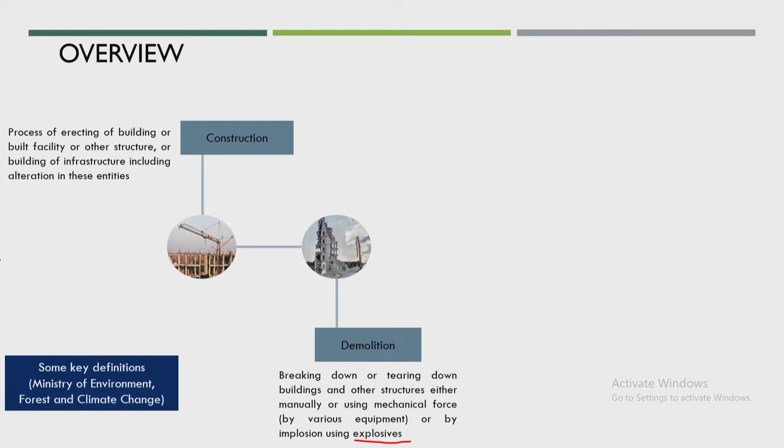When we talk about construction and demolition waste, as per the Ministry of Environment, Forest and Climate Change, construction is defined as the process of building any building or other civil structure or infrastructure. That gives the construction waste. Demolition waste comes from breaking down the building, and mostly these buildings are demolished by putting some explosives, and the entire building gets demolished.

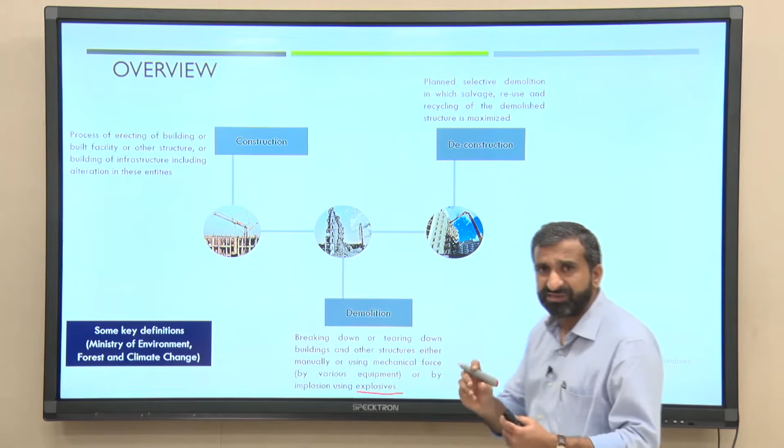The other one is deconstruction, which is different from demolition. Deconstruction means a planned demolition, which could also be for extension of the building. It is properly planned, and the waste amount will be as low as possible in the deconstruction process.

Finally, C&D waste comes from the building materials and debris used in construction, in repairing, or finally the entire demolition of any civil structure. The key difference between demolition and deconstruction is that deconstruction leads to less wastage and higher environmental sustainability. It is a properly designed demolition.

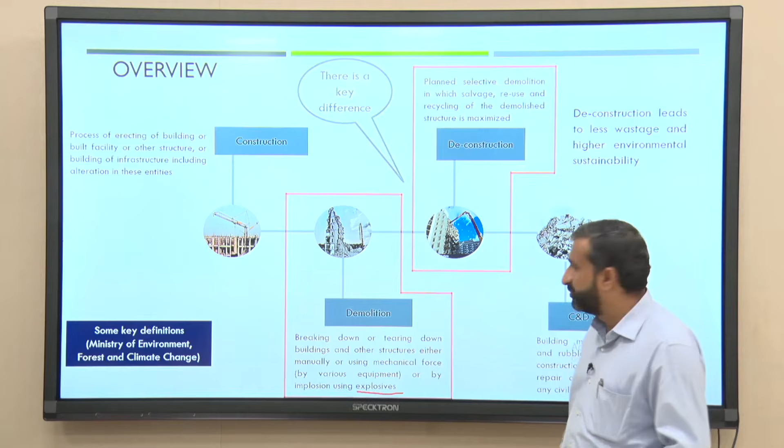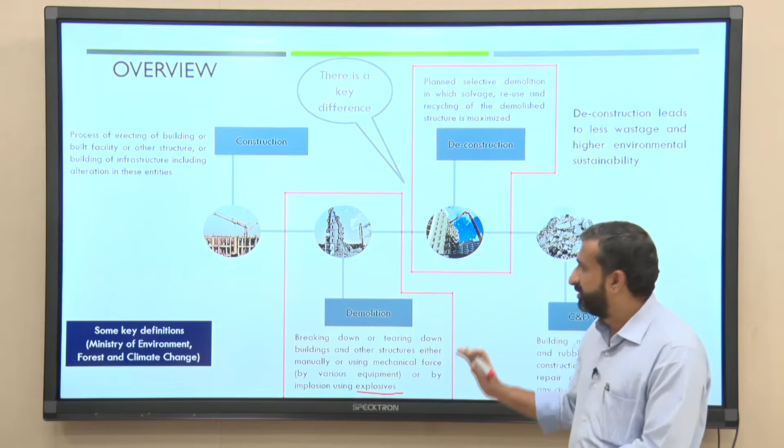But in India, I think both kinds of waste are normally generated, from deconstruction and demolition. But this is properly defined by the ministry for the generation of the waste.

Now, what is the Indian scenario of C&D waste? As of now, around 25 to 30 million tons per year of C&D waste is getting generated, and this is a very large quantity. If you compare with our MSW waste, that goes to 65 to 70 million tons per year. So C&D waste is almost half of the MSW being produced.

And why is the quantity very high? Because it is a construction material. So obviously the weight is very high in this case, and even without moisture the weight is very high. Why? Because the specific weight of this waste is also very high.

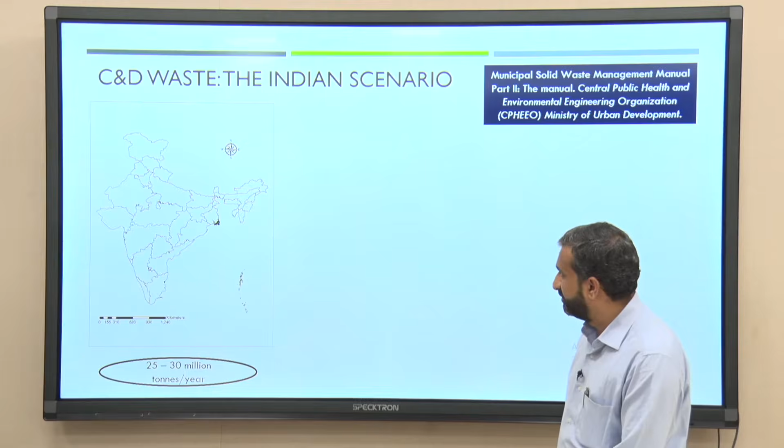Here also, if you see, the maximum amount of waste generated is from demolition. And also from structures with partial demolition or some masonry or concreting work, this waste is getting produced, and a small amount from minor construction repairs, but the major part is the demolition waste.

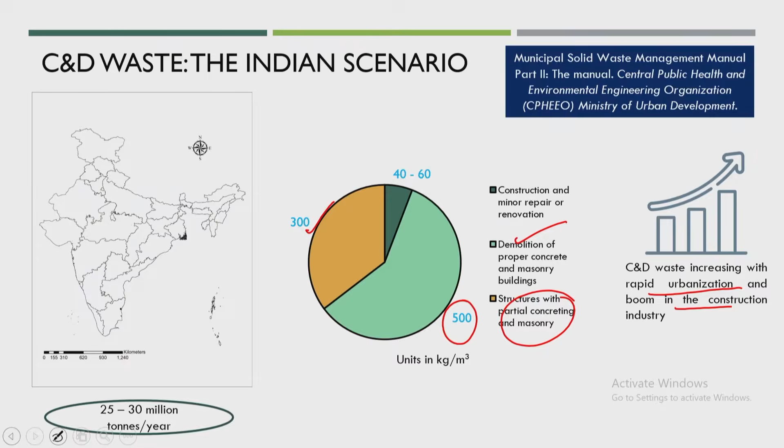And the problem is that C&D waste increases with rapid urbanization and the boom in the construction industry. This urbanization started in India in the last 15 to 20 years, and it is believed that by 2030 more than 60% of the population will be in urban areas. So obviously a lot of construction will be required, and more construction means more construction and demolition waste will be generated.

And I will not say we can exactly call this a waste, because it is a construction material. We can easily recycle this kind of waste, and the same waste can be useful for another construction facility, for road construction, even for building construction itself, or we can make some kind of brick out of it, and this fired brick could be useful for new construction. But the problem is that proper collection and proper storage is very important for C&D waste.

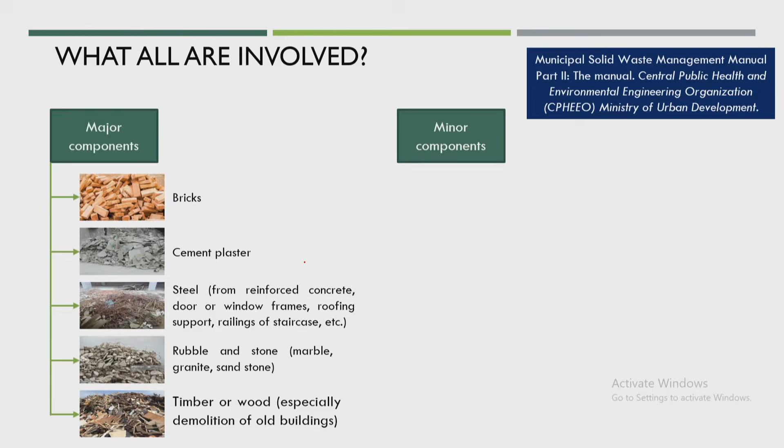So, what all are involved here? First there are major components and minor components. Major components are brick, cement plaster, steel, stone, granite, and wood or timber. These are the major components in C&D waste, and a few minor components like conduits, iron, pipes, electrical materials, panels or even glass panels, but these are minor; the major ones are these.

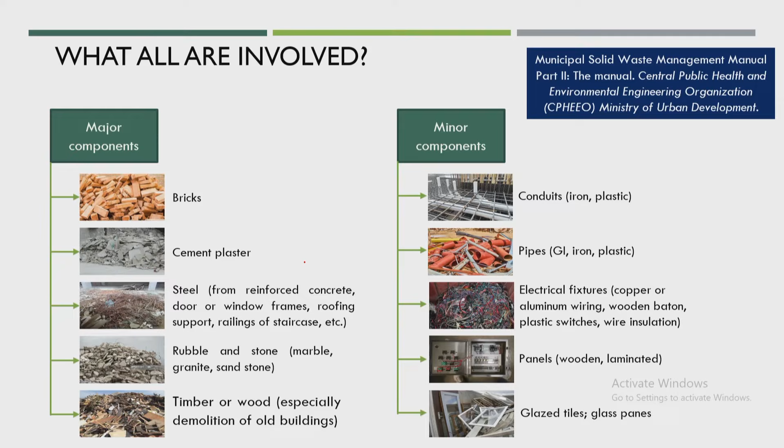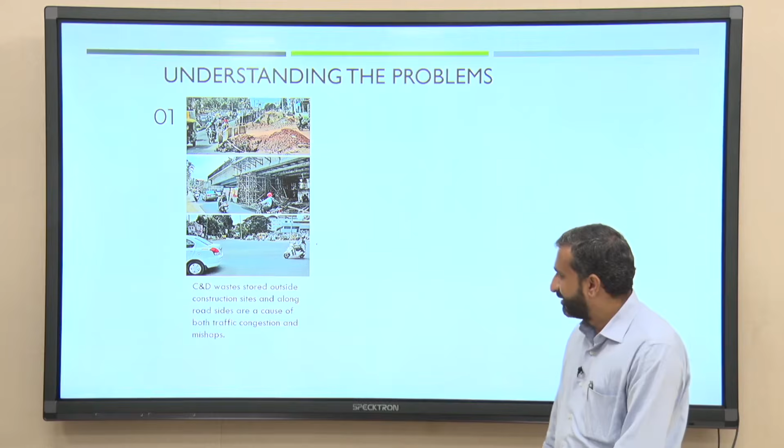Now, understanding the problem is very important. First we need to understand why C&D waste is becoming a major issue in our urban areas. Here you can see some photographs of C&D waste stored outside the construction site. Visit any construction area in your own city and you will normally see construction and demolition waste stored outside the site and along the roadsides, and the major problem is traffic congestion. Many times it will even close the drains.

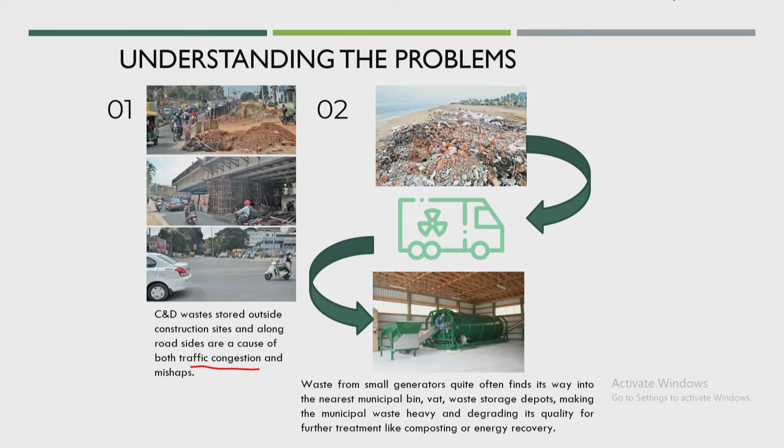And a problem is that if you dispose of this kind of waste into a disposal site, even a sanitary landfill, it will take a huge amount of area, and even transportation is very difficult for such waste.

Another problem: normally once the entire construction is over, many times this waste is stored near the construction facility until the local authorities or the construction company need to clear that area. Then mostly this entire waste gets disposed into a nearby bin, and there it is very difficult to collect by the collection vehicle which normally collects dry and wet waste, because these are very heavy materials, and the size is sometimes very big, which can't be easily stored in a dustbin. So this becomes a major issue now in most urban cities.

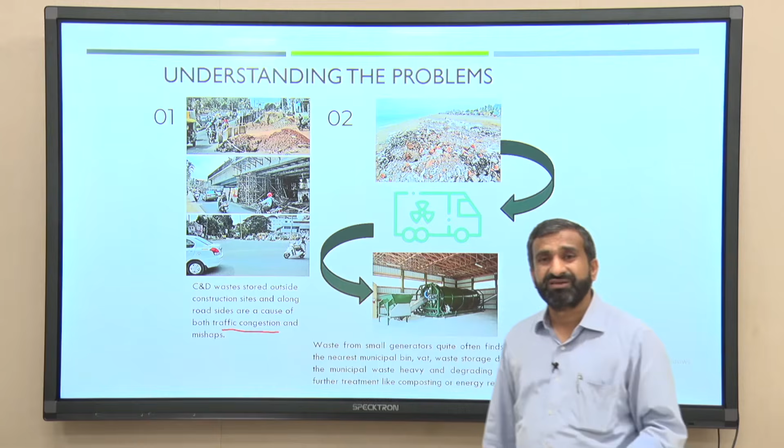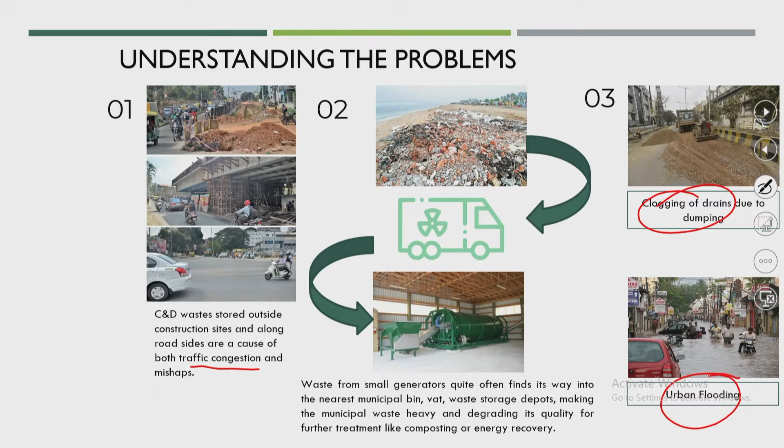And many times it will clog the drains, and you know that causes urban flooding. Every monsoon, you see most of the cities are in flooding condition, even major cities like Mumbai and Delhi. We have seen Chennai also completely flooded once, and this flooding is not because these cities do not have proper sewerage networks or storm water collection facilities.

I think some cities like Mumbai, one of the oldest cities, have storm water or sewerage collection facility or sewer network, but the problem is that these drains are getting clogged, not only because of plastic we are disposing, but also construction and demolition waste clogs these drains. So now the issue is that you have to properly collect it and get it disposed or recycled properly.

So who all are involved? If you talk about the major stakeholders, the first is the waste generator. The waste generator could be any person or association of persons or institutions or even residential area, commercial establishment like railway, airport, defense establishments - these are all the waste generators. They are the major stakeholders of this C&D waste generation.

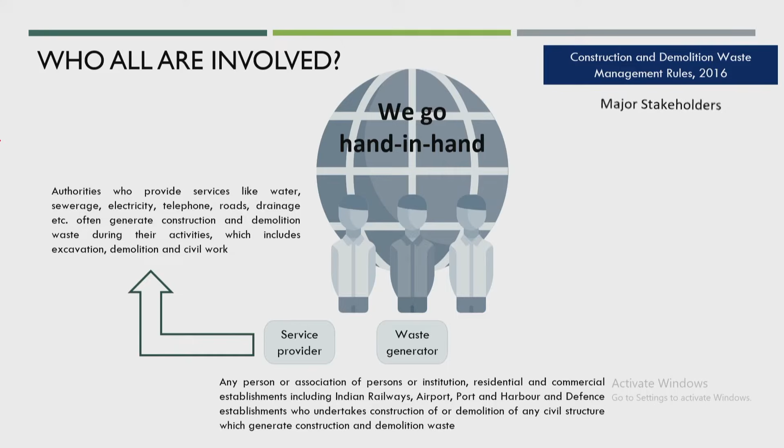Next is the service provider. So service provider means the water supply, sewer network, electrical, telephone, road, drainage - these facilities, those authorities which will provide the services, those are the stakeholders. And others is local authority. Local authority could be your municipal corporations - this is the major stakeholder - or the municipality for class 1 cities, or even Nagar Palika for class 2 cities, Panchayat for rural areas.

And why do these become major stakeholders? Because this authority has to come up with particular bylaws, particular rules. Although we have the C&D waste rule available with us, to have those rules in that particular city, the local authority has to come up with their particular facilities. Like if they are asking to store or collect this C&D waste, they have to provide one particular facility.

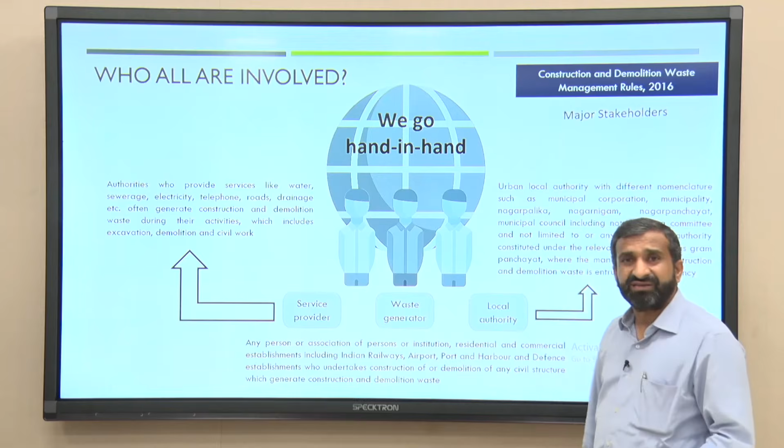And somebody, suppose some kabadi wala, is able to collect that particular waste, so you have to provide one particular facility for that. So that is the major task for the major stakeholders in the C&D waste.

Now if you talk one by one - waste generator, their responsibility. If you talk about Construction Demolition Waste Management Rule 2016, in clause 4, the responsibilities are given for the waste generator for the collection of C&D waste, segregation of C&D waste, and even the storage responsibility is given. And normally these waste generators generate around more than 200 tons per day or 300 tons per project.

What is their other responsibility? Like segregate the waste into 4 streams such as concrete, soil, steel, wood and plastic, brick and mortar. Likewise, these 4 streams, they have to segregate the waste, submit the waste management plan, get appropriate approval from the local authority before starting construction or demolition or remodeling work.

And this waste generator could be some construction industry, one particular private company could be a waste generator, even one particular household, where they can ask the authority to segregate the waste and also particular storage - the local authority should provide that to those particular household people.

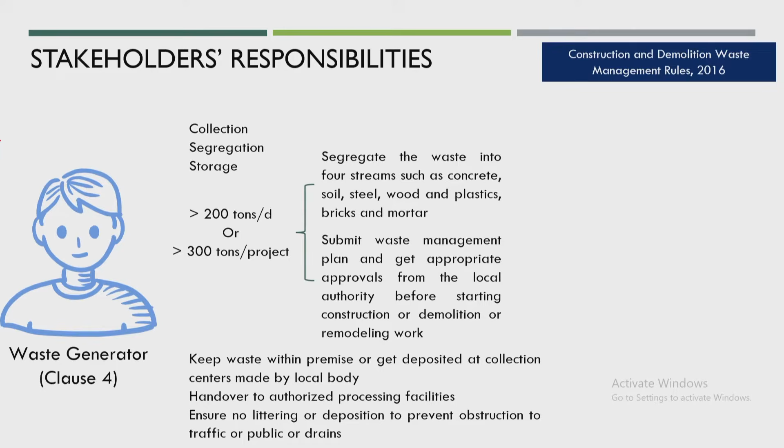And also one special responsibility is given - keep waste within the premises or get it deposited at collection center made by the local body, hand over to the authorized processing facility, ensure no littering or deposition to prevent obstruction to traffic or public or drain. This is also one important responsibility given to the waste generator - while transportation of such waste, littering of that waste should not be there onto the road.

And also you have to pay relevant charges, based on whatever charges is applied or asked by the local authorities. And the generators of more than 20 tons per day or more than 300 tons per project have to pay for the processing and disposal apart from storage, collection and transportation. So this payment is normally for 20 tons per day or 300 tons per project.

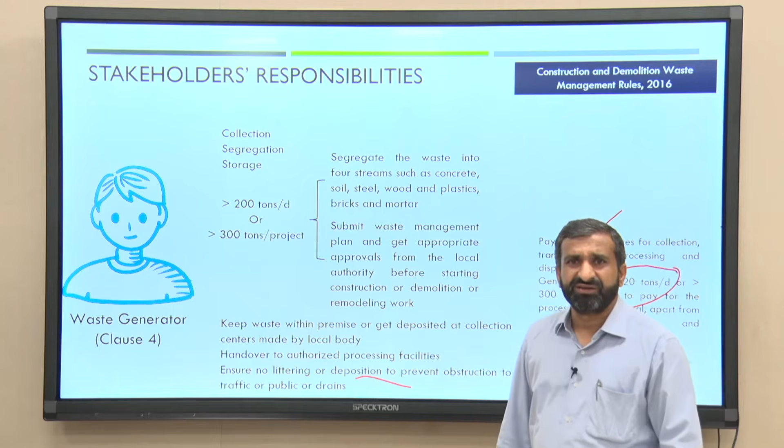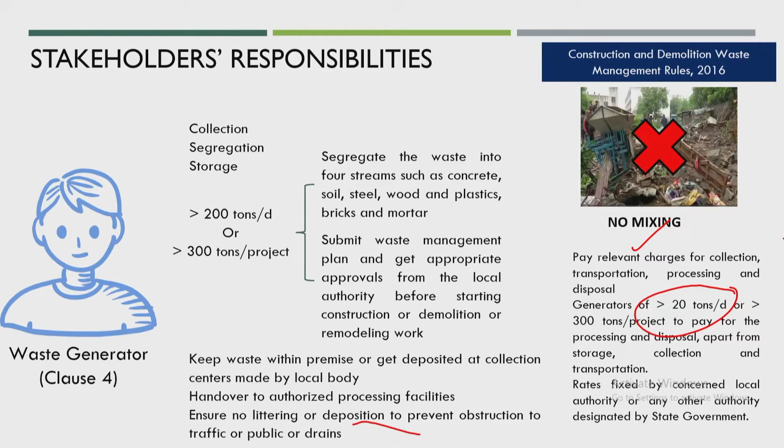So mostly in this case the big construction industry is only involved. Obviously because they have to dispose the waste, they have to pay some charges also, with rates fixed by the concerned local authority and any other authority designated by the state government. So, no mixing - this is the special guideline given for the waste generator. The waste should not get mixed with MSW.

Now the next is the service provider or their contractor in clause 5, who have been asked to prepare within 6 months from the date of notification a comprehensive waste management plan covering segregation, storage, collection, reuse, recycling, transportation and disposal of construction demolition waste generated within their jurisdiction. So within 6 months the plan has to come up from the service providers.

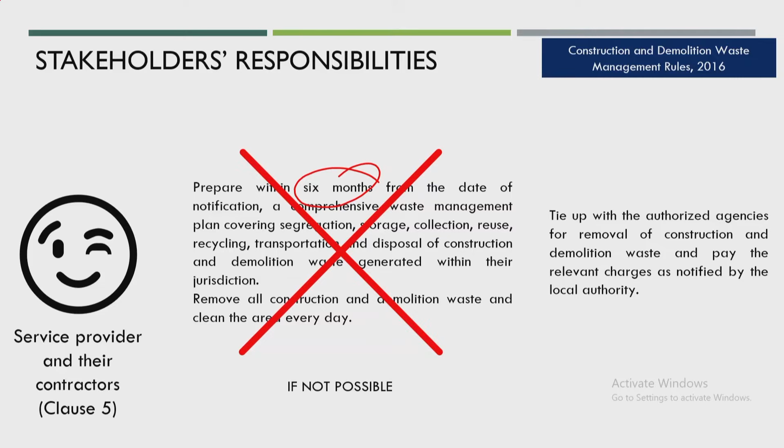Also, it has been asked that all construction and demolition waste be removed and the area cleaned every day. Suppose this is not possible by the service providers - what can they do? They can tie up with the authorized agency for removal of construction demolition waste and pay the relevant charges. Suppose they are not able to come up with a particular plan and can't provide one particular facility, they can tie up with another authority and pay the relevant charges for those facilities.

Now the next stakeholder is the local authority. Their responsibility is given in clause 6. It has been asked that they issue detailed directions and seek a detailed plan or undertaking with regard to proper management of construction demolition waste within their jurisdiction.

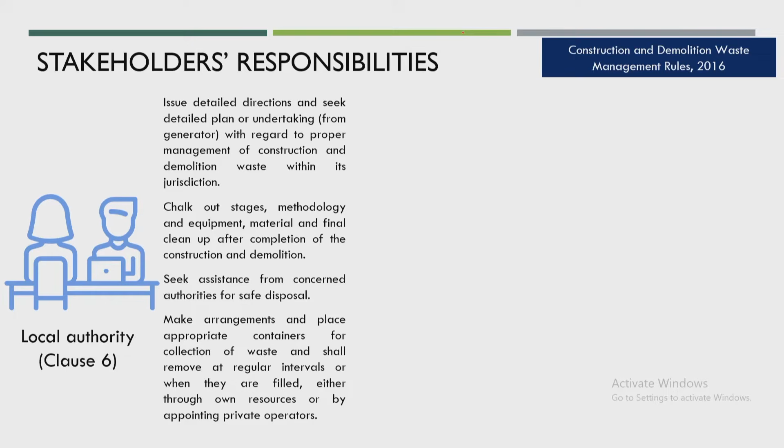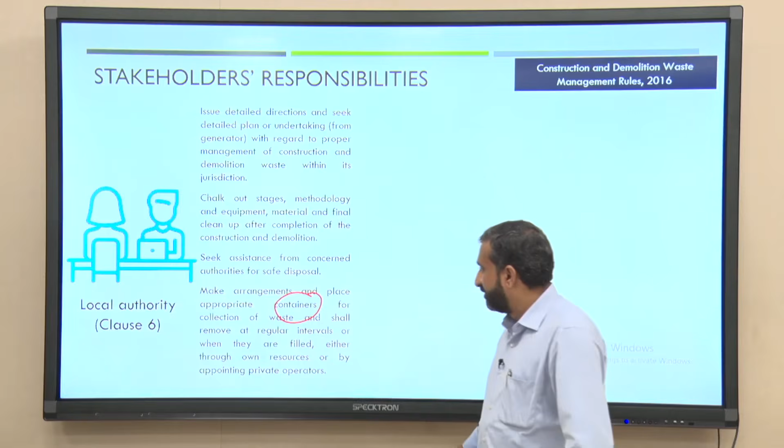They must chalk out stages, methodology, equipment, material and final cleanup after completion of C&D waste work, and can take assistance from the concerned authority to make arrangements and place appropriate containers for waste collection, which shall be removed at regular intervals or when filled, either through own resources or by appointing private operators. So they have to arrange containers at such facilities, or they can appoint a private contractor who will collect the waste, properly dispose of it, and also transport it.

There should also be a particular incentive given to the generator for processing and recycling in situ. So they can also ask the construction company - if you are able to reuse the waste, a proper incentive should be given to them.

They must examine and sanction the waste management plan for the generator within one month from the date of approval of the building plan, keep track of the generation of C&D waste within its jurisdiction, and devise appropriate measures in consultation with expert institutions for management of C&D waste.

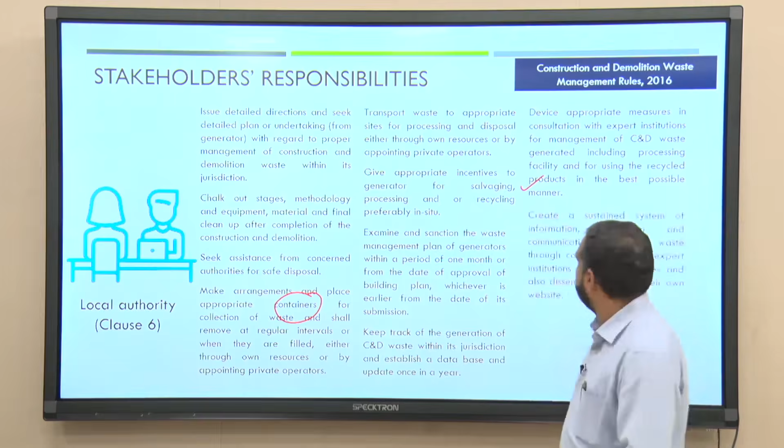These expert institutions could be academic institutes, or whoever is using or recycling such C&D waste. They must also create a sustained system for information, education and communication for C&D waste through collaboration with expert institutes, and provide incentives for the use of material made from C&D waste in construction activity.

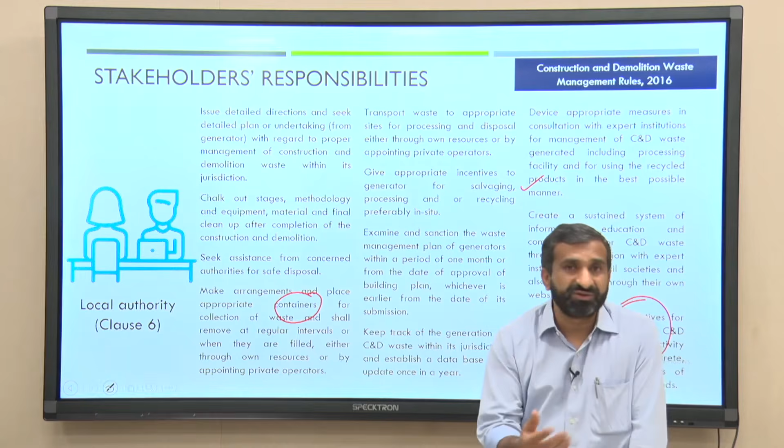This is one of the important points - they can start different awareness programs and also some kind of incentives. Whatever waste you generate, if you are able to reuse it in your own construction, or for construction material - if for new construction, any particular construction industry uses recycled material for their new construction, then obviously you pay some kind of incentive to them, so that the maximum amount of waste gets utilized.

Now, the management of C&D waste through sustainable solutions - how can sustainable solutions be possible? Like proper storage, collection, transportation, disposal, and especially processing. If you do proper processing, you assess the potential for reuse and recycling, and propose reuse and recycling of processed C&D waste. Again, it's not only the utilization of recycled material that is important, but also finally the environmental considerations. So this will be a major proper sustainability solution for the management of C&D waste.

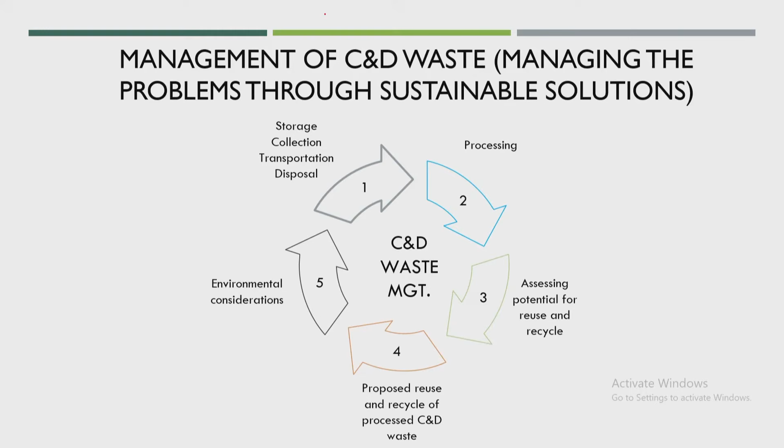So we will go one by one. We will start with storage, collection, and transportation.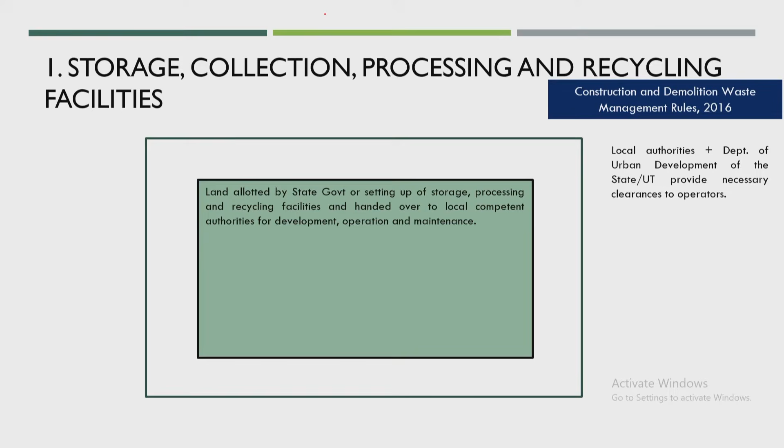Proper land should be allotted by the state government for setting up storage, processing and recycling facilities, and handed over to the local competent authority for development, operation and maintenance. The local authorities, plus the Department of Urban Development of the state, provide necessary clearance for operators.

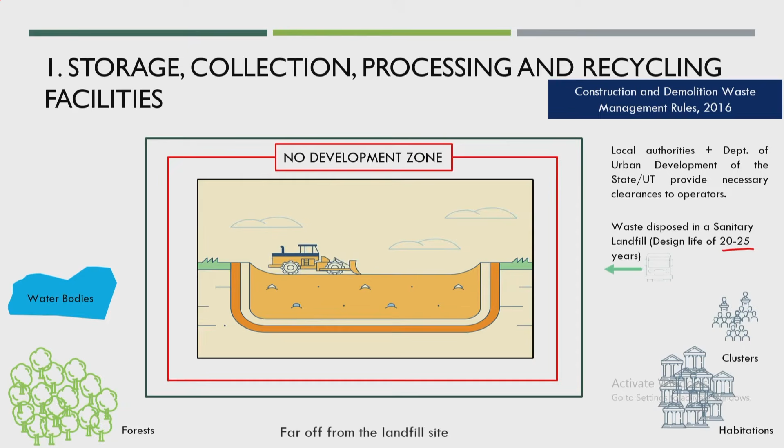So, suppose one particular location is finalized where we can have proper storage, processing or disposal of C&D waste - this design should last 20 to 25 years, and be located far from the landfill site, far from the forest, far from water bodies, or far from clusters or habitations. It should not be close to water bodies, forests, or habitations, and the nearby area should not have development.

Go for proper fencing, proper approach road, a weighing bridge so that the amount of waste entering the facility can be measured, and provide proper facilities like water, sanitation and hygiene. Ensure storm water drains prevent water from entering that area, provide monitoring of ambient air quality at the vicinity, and go for proper plantations in the nearby area.

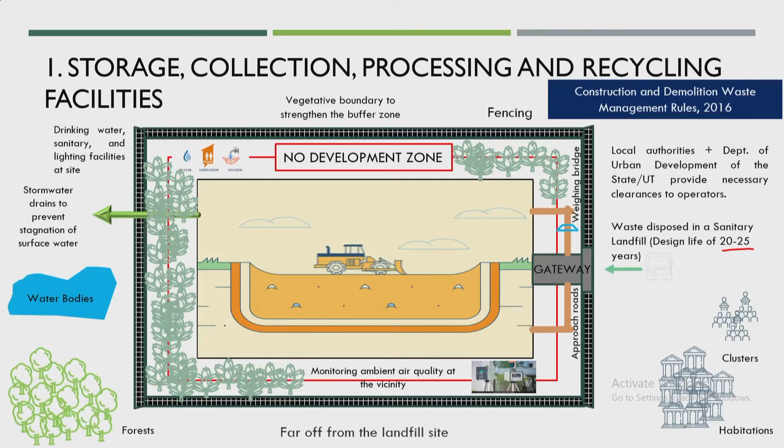So, this was the complete thought about complete facility of storage, collection and processing, and even disposal facilities or landfilling facility in this particular area. So, what is the role of ULBs here?

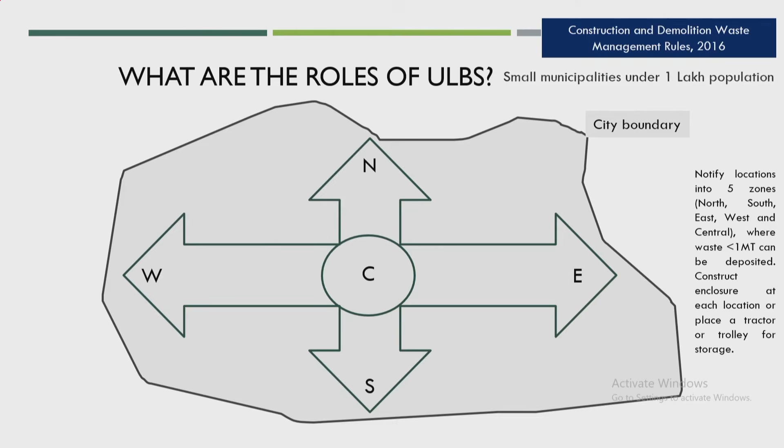Now, it has been notified. This role is explained specially for small municipalities under 1 lakh population, the small habitations, where it has been notified that the entire city has been segregated into 5 zones: north, south, east, west and central, where waste less than 1 metric ton can be deposited, and construct an enclosure at each location or place a tractor or trolley for storage. So, all 5 locations should have a closed tractor or trolley provided.

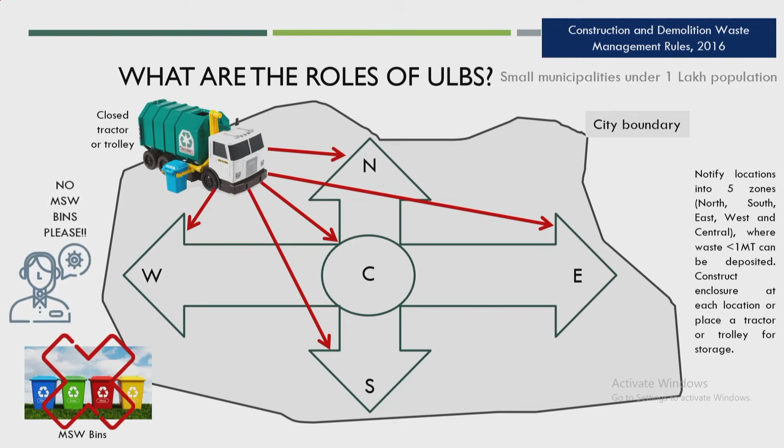And C&D, these kinds of waste, should not be disposed into the MSW bin. Remember that, and try whatever waste is getting stored to reuse or recycle; if not, it can go for landfilling.

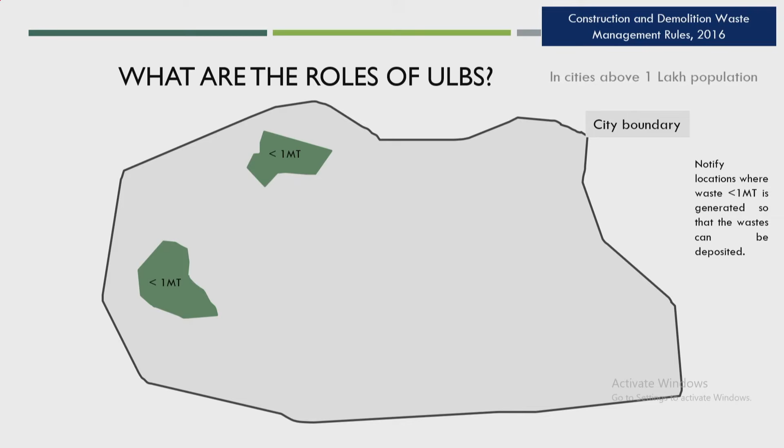And now for cities above 1 lakh population, it has been notified that the location where waste less than 1 metric ton is generated, the waste can be deposited there, and some locations where waste could be stored more than 1 metric ton should be identified and notified at prescribed rates. Again, no MSW storage, and proper transportation facilities should be provided, like the small 4.5 cubic meter and 10 cubic meter vehicles in case of waste storage more than 1 metric ton, and also reuse, recycle and finally go for landfilling.

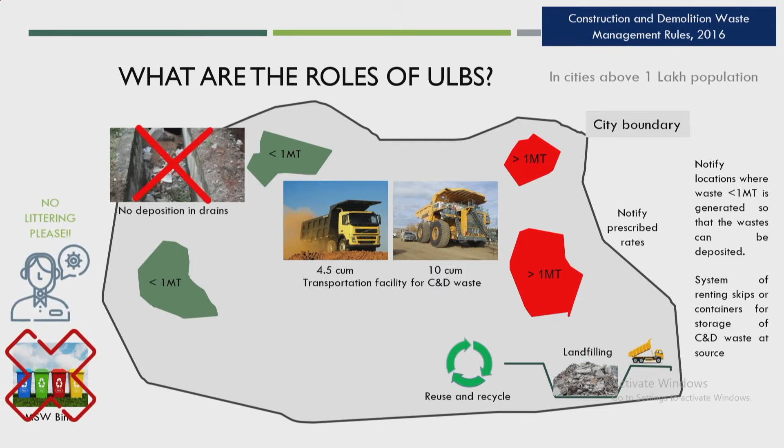It has also been asked that there be no deposition in the drain, and whatever demolition waste is generated should go for segregation and loading, and be put into the designated site, and whatever charge is required for the bulk generator, ask them to pay those charges.

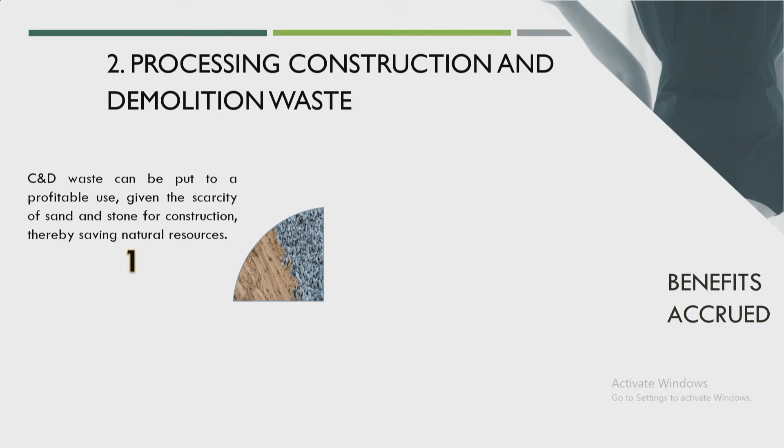Now, the processing of construction and demolition waste - what benefits can we get from it? The C&D waste can be used in place of sand, stone for construction, and can be easily reused.

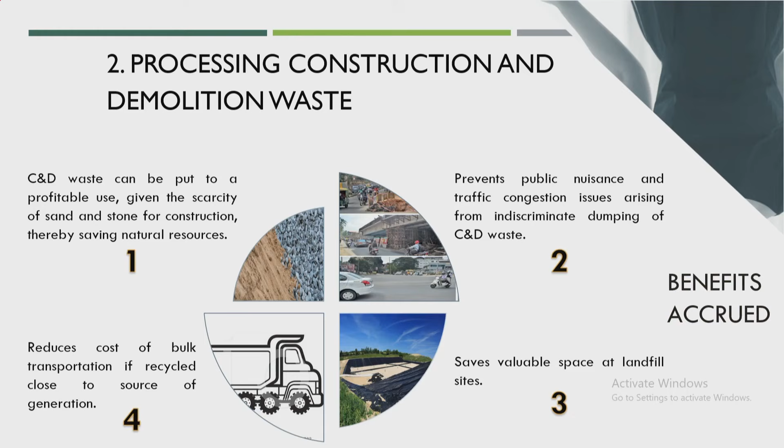Also, it will prevent public nuisance or traffic congestion caused by storing waste very close to the construction facility, which will obviously save valuable space at the landfill site if you are reusing such material, and finally reduce the cost of bulk transportation or recycling if that waste is generated or reused at the generation facility itself.

So now, reuse and recycling potentials - I have come up with around 12 to 14 different waste types and their end uses.

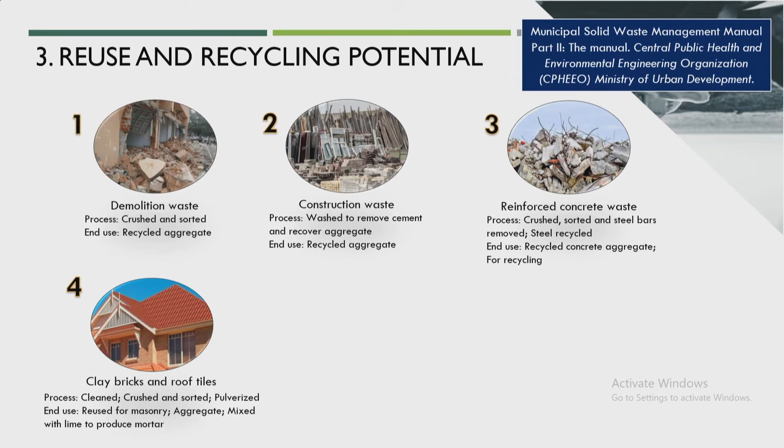First, demolition waste - end use could be recycled aggregates, like construction waste, end use could again be recycled aggregates. Reinforced concrete waste - end use could be recycled concrete aggregate. Clay bricks and roof tiles - end use could be reused for masonry aggregates or mixed with lime to produce mortar. Calcium silicate bricks could also be reused for masonry, or another brick could be prepared from that. Natural sand and natural stone masonry can also be reused for masonry and aggregate.

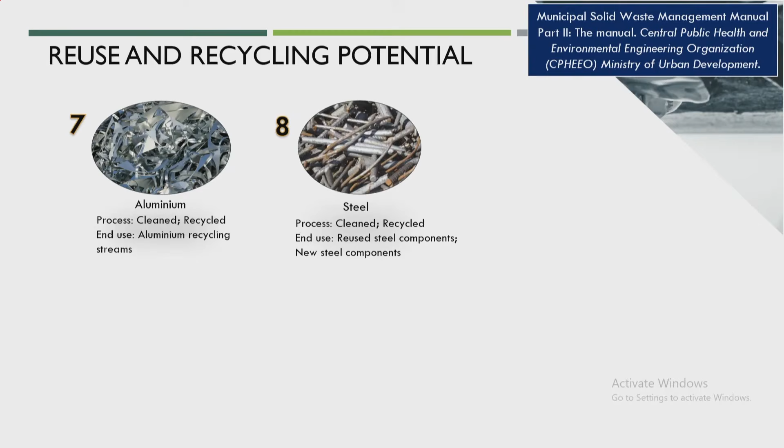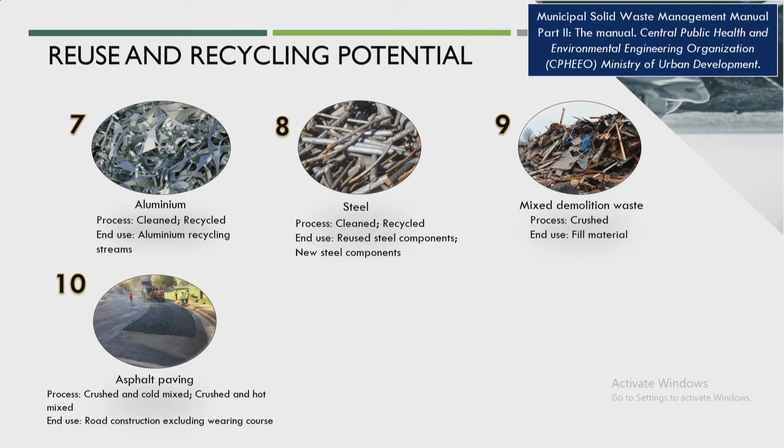Aluminum is a recyclable material, and all steel components are recyclable - new steel components can be created from them. Mixed demolition waste can be used as fill material. Asphalt paving can be used for road construction, and ceramic tiles can be used for flooring and aggregate production.

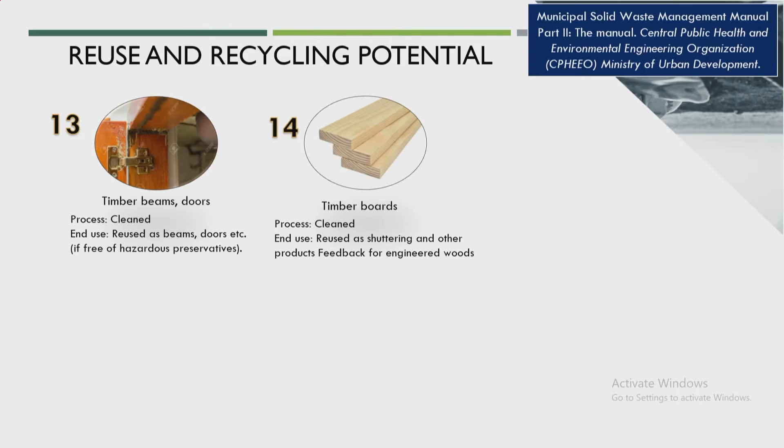Natural stone slabs can also be used for flooring or aggregate production. Timber beams and doors can be reused as beams or doors if not hazardous. Timber boards can be used for shuttering or other engineered wood. Plastic is recycled completely, and even gypsum plaster board has a good end use. Glass is completely recyclable.

The use of construction and demolition waste for road works is very popular. There is a report submitted by the Central Road Research Institute (CRRI) in Delhi stating it is possible to use construction and demolition waste for road and embankment construction, such as for subgrade construction, sub-base construction, and even for rigid pavement.

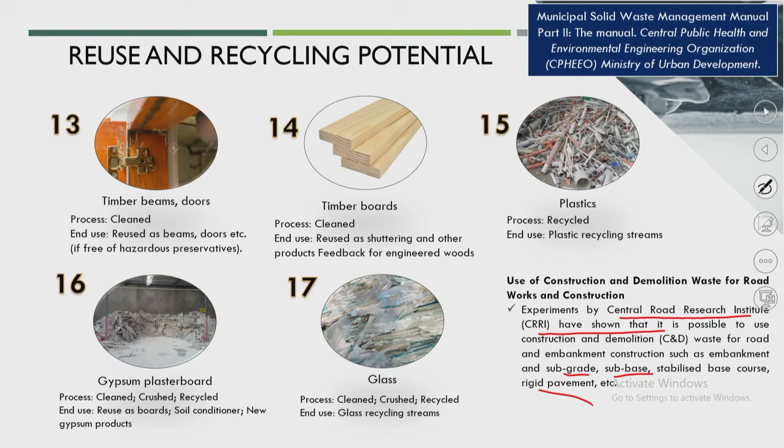So, I think I have come up with 17 different waste materials that can easily be recycled and also utilized for other purposes.

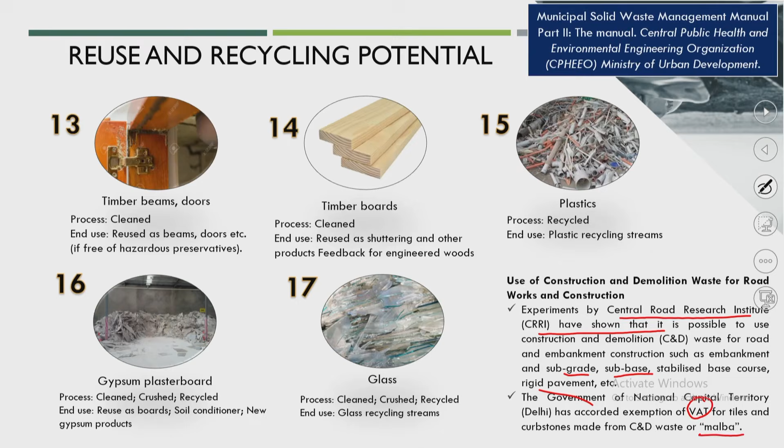So, the Government of National Capital Territory Delhi has accorded exemption of VAT also for tiles and curbstone made from the C&D waste or malba. In Hindi we call this malba. So, they won't ask the VAT for that. So, this is also a good bylaw from the local authorities.

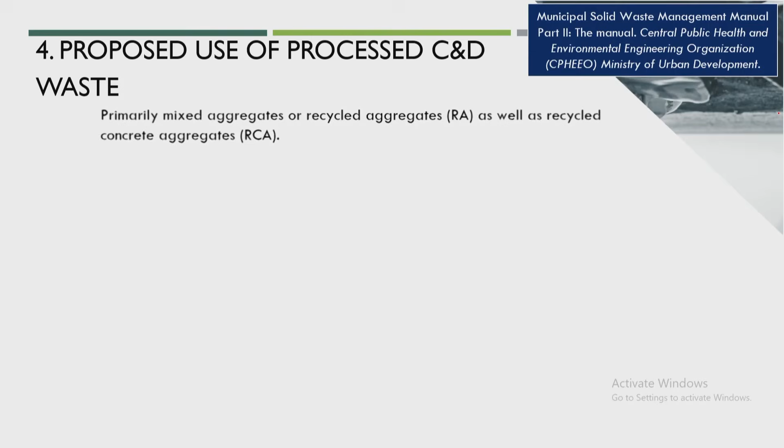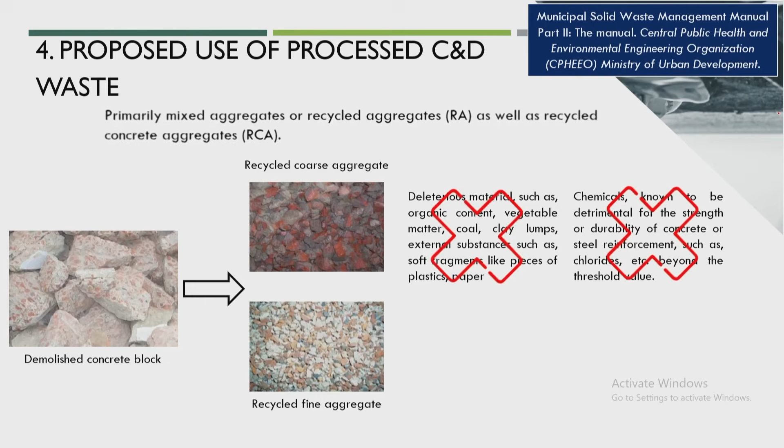Now, the proposed use of processed C&D waste is primarily mixed aggregates or recycled aggregates as well as recycled concrete aggregates. Like this demolition concrete block can come up with recycled coarse aggregate and even fine aggregates, and where it won't be possible to use other material, we can use this kind of material very easily.

So, fine washed aggregate in the range of 4.75 mm to 0.075 mm can be utilized for other construction purposes. So, these kinds of coarse aggregates and fine aggregates can be used for making concrete for non-structural purposes. Also all grades of PCC could be made out of these aggregates.

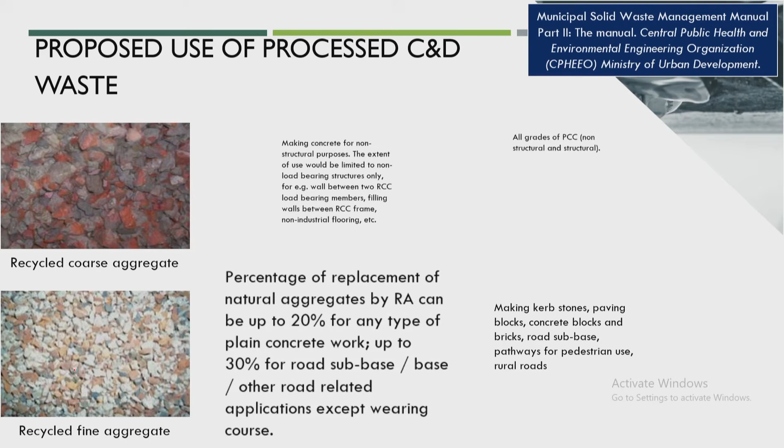Around 20% of aggregates we can replace by these kinds of aggregates, and also we can make paving blocks, concrete blocks or bricks using such coarse and fine aggregates. And here also you can see the processed material can be used for different purposes, like the drainage layer in the leachate collection system, even for daily cover, and for civil construction in a sanitary landfill.

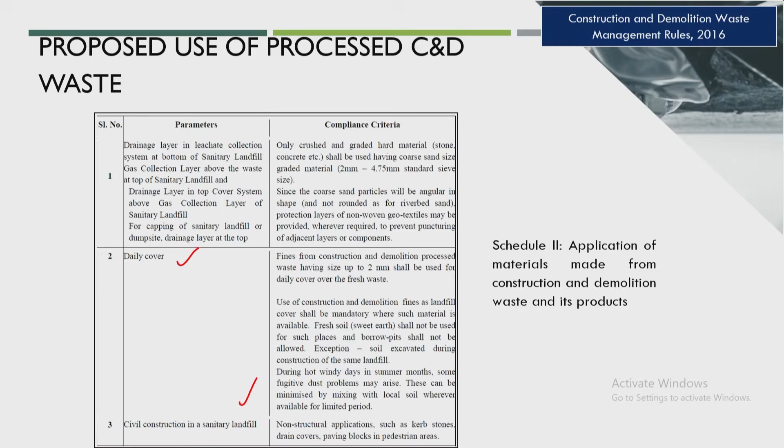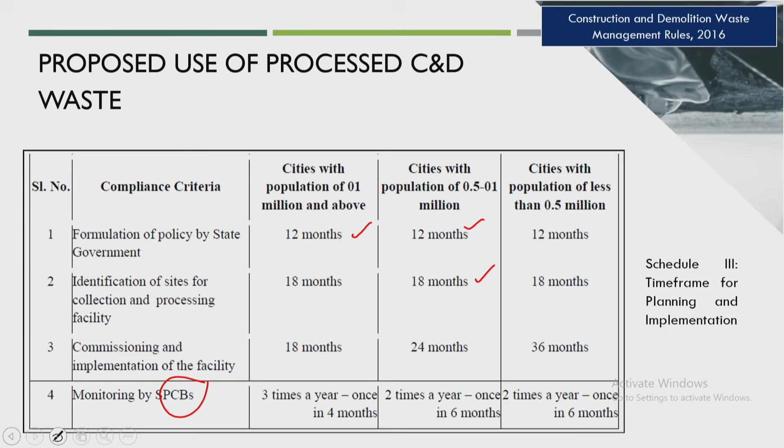And if you see the compliance criteria from the local authorities like the city, the monitoring will also be done by the State Pollution Control Board under the Construction and Demolition Waste Management Rules 2016. The timeline is given for each city of different population to come up with a particular policy, identified sites for collection and processing, and commissioning of those facilities, like 12 months and 18 months. Even for the smaller population, within 36 months they have to come up with the facilities.

Now, last is the environmental considerations. So, the major issue is that because of this construction material a lot of dust is getting generated and a lot of noise is also getting generated at construction facilities. So, another thought is given in the CPHEEO manual on activities at the construction site like site clearing, site operation, transporting materials or sorting of C&D waste.

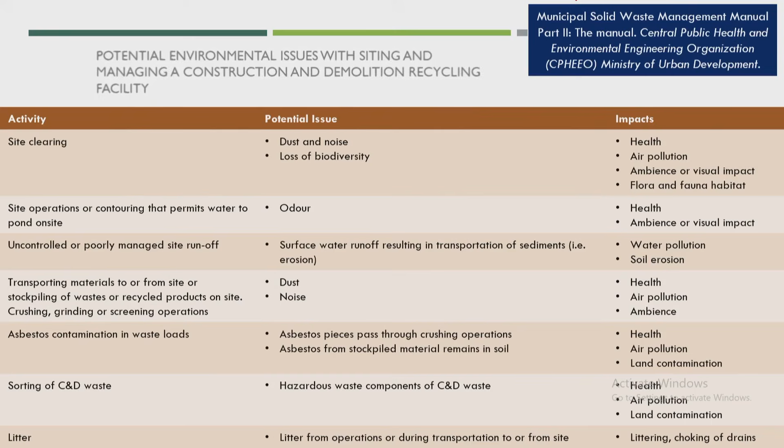So, what could be the potential problems of those activities? Dust, noise and odor are the major ones, and a lot of health issues also; we are well aware of the potential problems of all these activities.

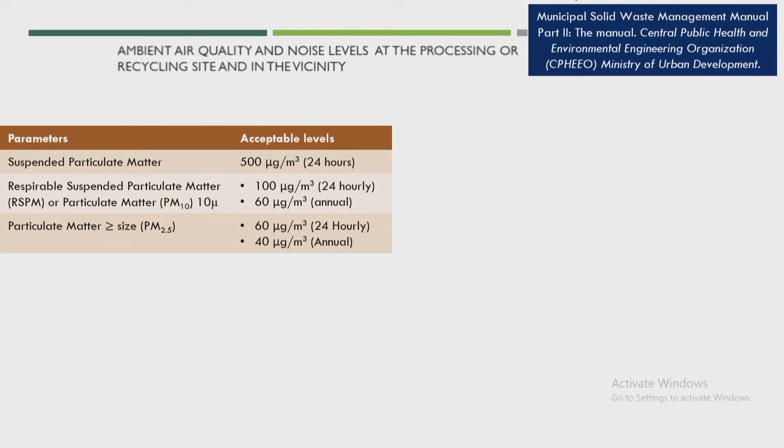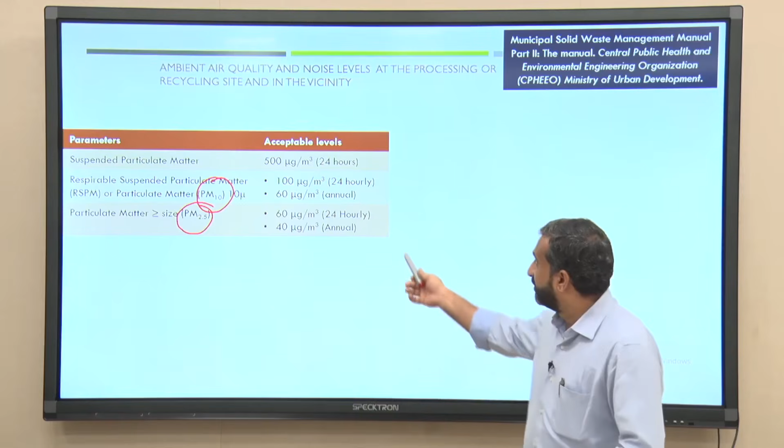And ambient air quality has to be properly monitored, especially for suspended particulate matter, PM 2.5 and PM 10. This monitoring has to be done at that particular local construction site. So, suppose in the city new construction facilities are coming up, proper monitoring stations have to be provided by the State Pollution Control Board, and they also have to follow the acceptability level of suspended particulate matter, PM10 and PM 2.5.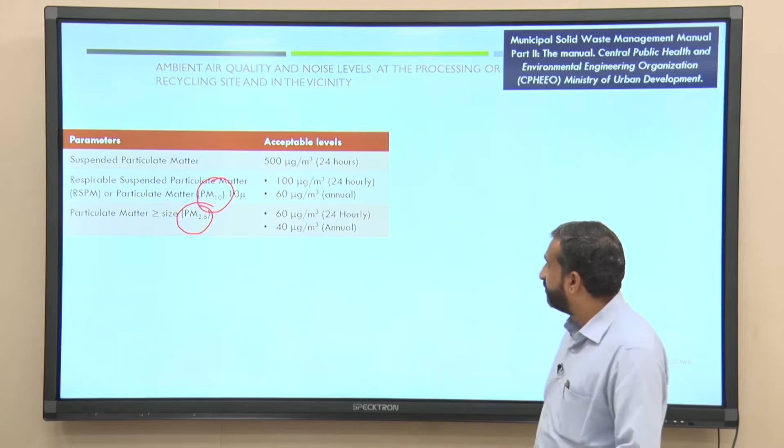So, a proper schedule has to be carried out by the local authority and the State Pollution Control Board, like 6 times a year for cities having population of more than 5 million, 4 times a year for cities between 1 million and 5 million, 2 times a year for towns or cities between 1 lakh and 10 lakhs or 1 million, and once a year for all towns having population below 1 lakh. So, likewise they have to monitor.

And for noise level, the noise standard recommended by the Central Pollution Control Board and notified under the Environment (Protection) Rules 1986 for industrial areas shall be applicable. That also needs to be checked from time to time.

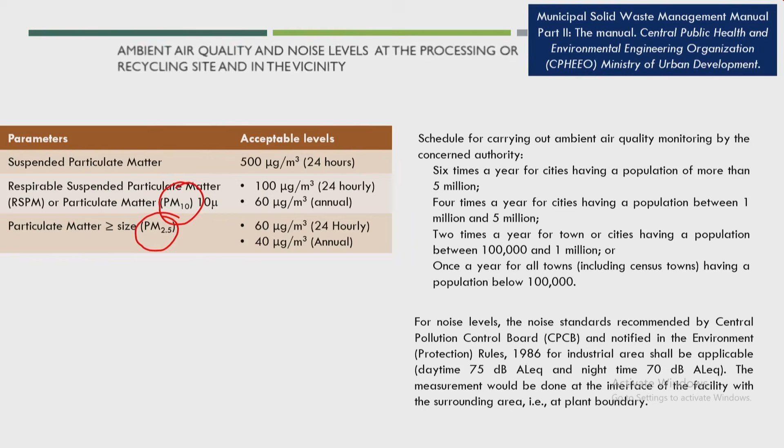And also, wherever the recycling facility is provided, the recycling should be completed within 5 years. A minimum of 80% of C&D waste generated at the site is recycled and reused within the same site, and also provide a buffer area to store the waste.

So, if you look at examples for India, the first pilot project of construction and demolition waste management was in Burari, Jahangirpuri, New Delhi. That was a PPP project with a private company named IL&FS, and the concession agreement was signed for 10 years. So, the idea was setting up a processing unit under the North Delhi Municipal Corporation.

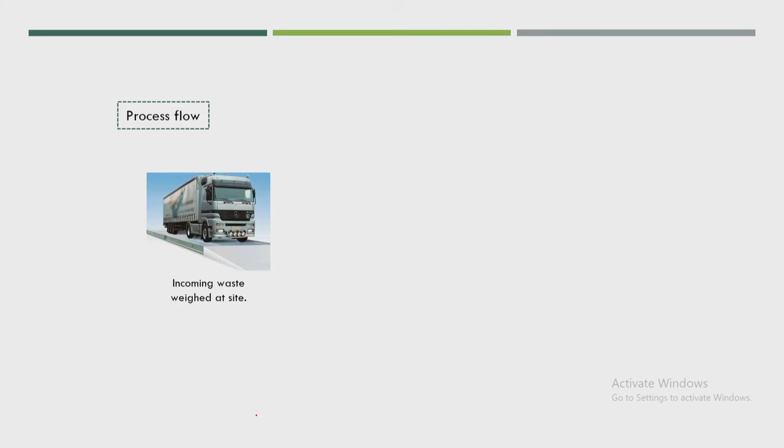So, what was their idea? The process flow: incoming waste is weighed first, and undesirable items like rags, plastic, metal and fiber are segregated by mechanical and manual means. Whatever waste remains is again segregated into 3 parts: whole brick, large concrete and mixed C&D waste. So, likewise you will see here 3 different segregated materials.

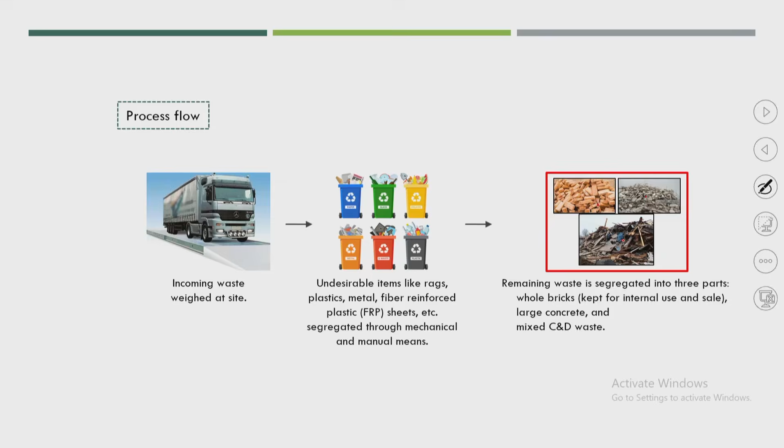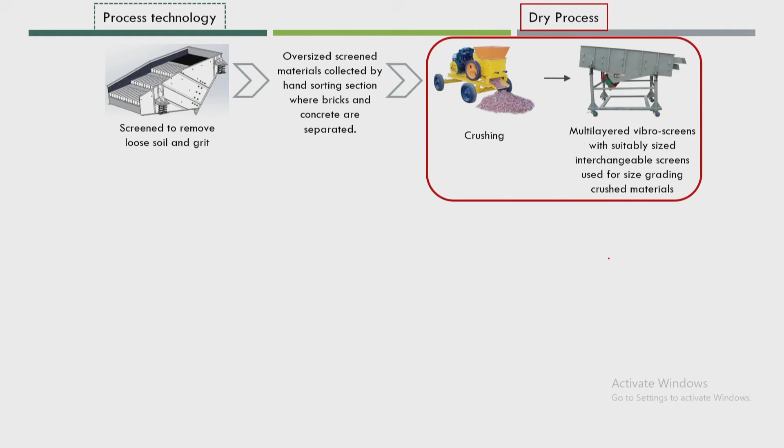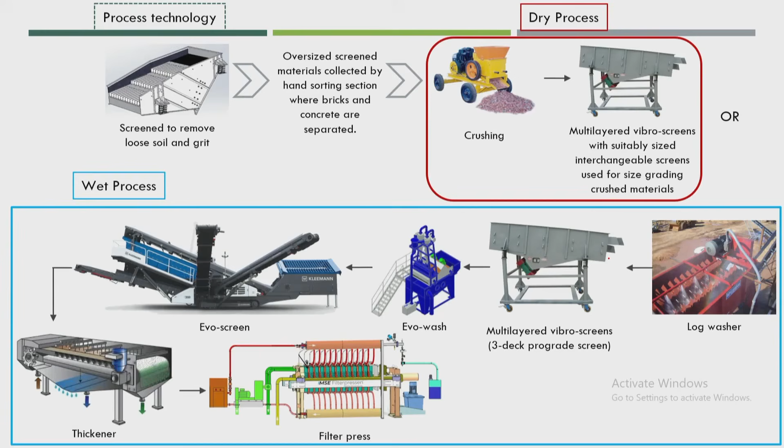The process technology was screening to remove loose soil and grit and oversized material, and the materials get crushed properly and screened under the dry process. In the wet process, there is a log washer followed by a multi-layered screen and washing again, and finally a filter press, and a proper product comes out.

You can see here, this is one product they came up with, the brick from the C&D waste. These are used for making roads, sub-base, granular sub-base, pavement blocks and precast products like curbstone, paver block and square tiles in the city area. So, that was one of the very good projects.

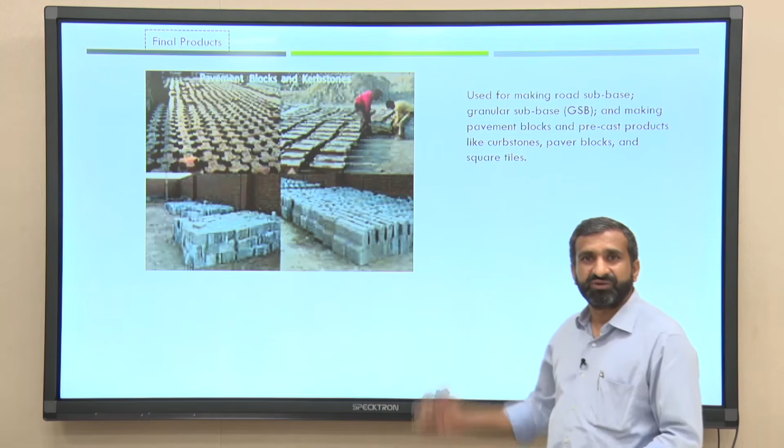So, all the C&D waste is converted into brick through the dry process followed by the wet process, giving a very good product that can be utilized for other infrastructure facilities. The loose soil separated is sold, and manufactured sand is used for making ready mix concrete for non-structural applications.

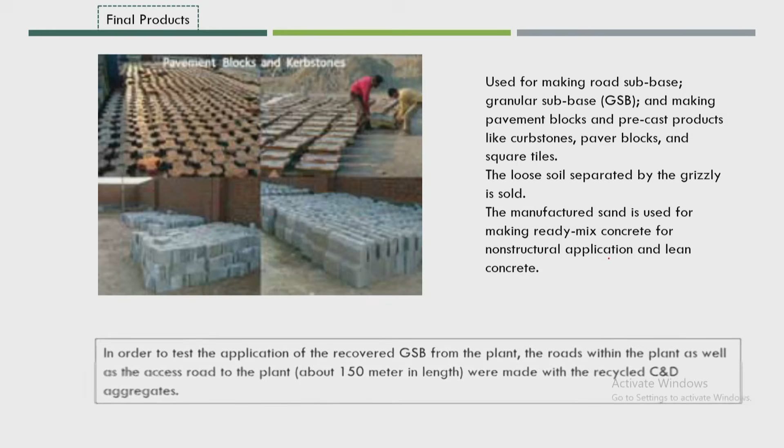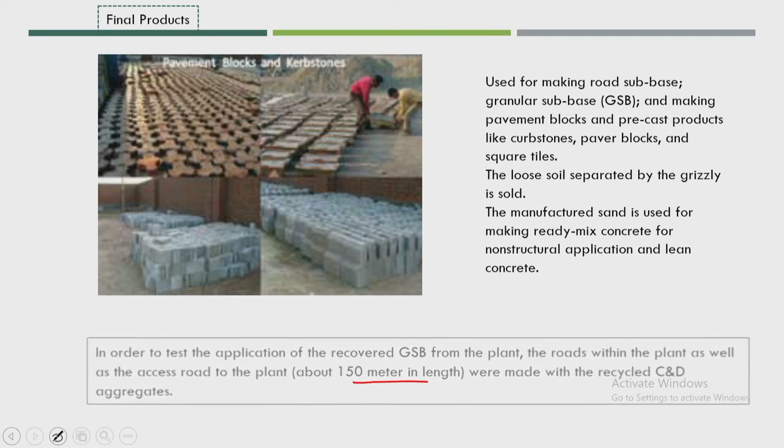To test the application of the recovered material, the road within the plant as well as the access road to the plant, about 150 meters, were made from recycled C&D waste. So, I think that was a good idea from this PPP project. They constructed their own facilities from recycled C&D waste, so that they can propose to other construction companies to utilize this material.

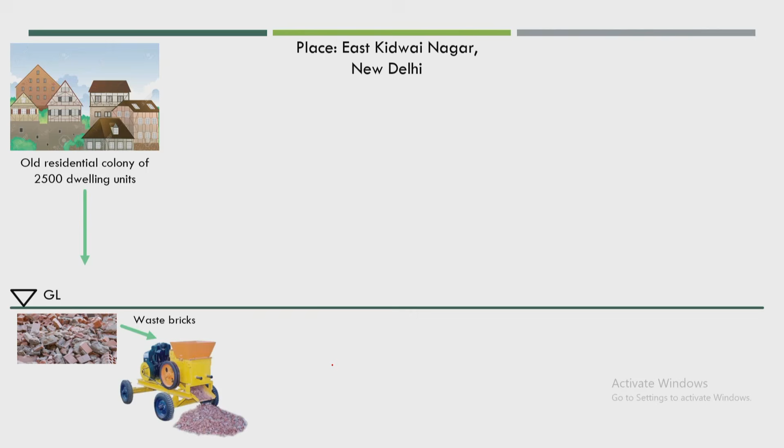Another example is in situ recycling of C&D waste at a development site by National Building Construction Corporation, NBCC, in East Kidwai Nagar, New Delhi. Earlier there was an old residential colony of 2500 dwelling units that was demolished, and after demolition they got waste bricks. The bricks were crushed and ground again, and the new bricks are sun dried for 4 weeks and used for new buildings.

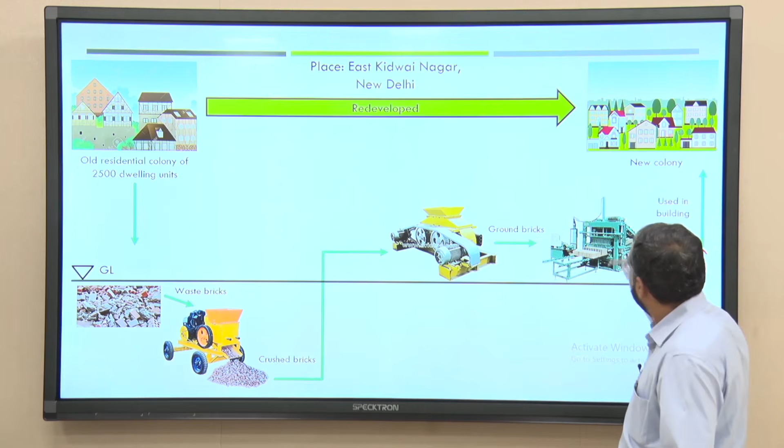So, this was actually developed from the same material. This was a very good project where the entire demolition waste was collected, crushed and made into another product, and from that another construction facility was created. It avoided the need for transportation of C&D waste, resulting in substantial savings in transportation cost, because the recycling facility was created in the same location.

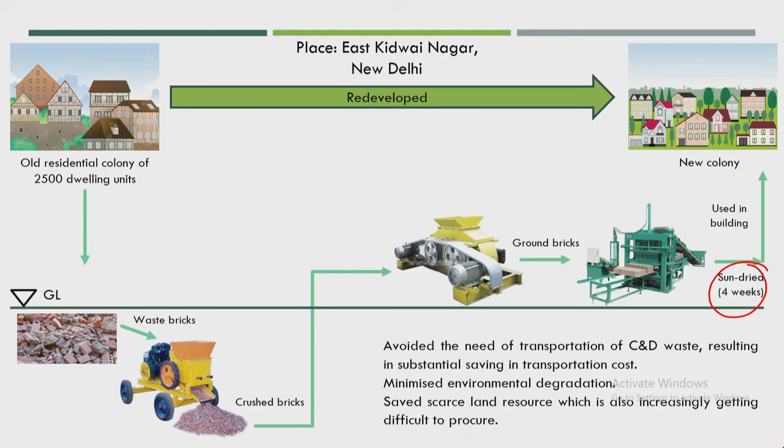So, the waste was at the same location, the recycling facility was at the same location, and the new construction also was at the same location, so there was no transportation cost. It minimized environmental degradation and saved scarce land resources, which are increasingly difficult to procure. Here we saw that the quantity is very large and storage, handling and transportation are somewhat difficult, but we saw 2 case studies in Delhi where demolition waste was utilized for new construction facilities.

It is not only for building construction; for road construction you require different kinds of base materials, and sometimes these base materials do not require that kind of compressive strength. The bricks required for building construction have different compressive strengths than those required for road construction. So, whatever product comes out can be used for different construction facilities.

I believe that 100% of this C&D waste should be utilized. The only problem is that small towns, especially towns with population less than 1 lakh or less than 1 million, do not have that kind of facility, because getting space in the city area for storage and recycling itself is a difficult task. But that rule came up in 2016.